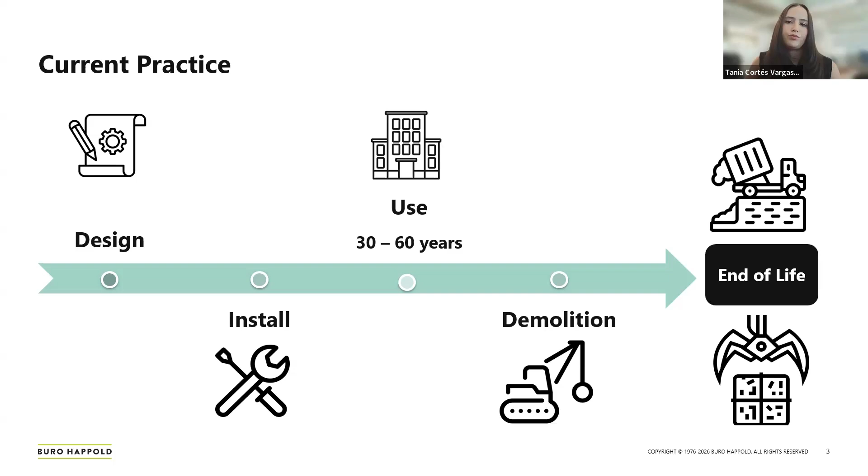So that's actually pretty critical, and this matters a lot because first, from a carbon perspective, reusing components avoids manufacturing new ones and therefore sourcing raw materials. And that helps preserve the embodied carbon that has already been invested in components that were manufactured. From an adaptability perspective, we don't really understand that buildings are not static entities. Buildings are always changing, and facades can become obsolete if they cannot keep up with those changes. And if they become obsolete, it's very easy that they get discarded. So we need to understand how facades and buildings in general can also adapt to the changes that we face regarding technology, regarding code, etc.

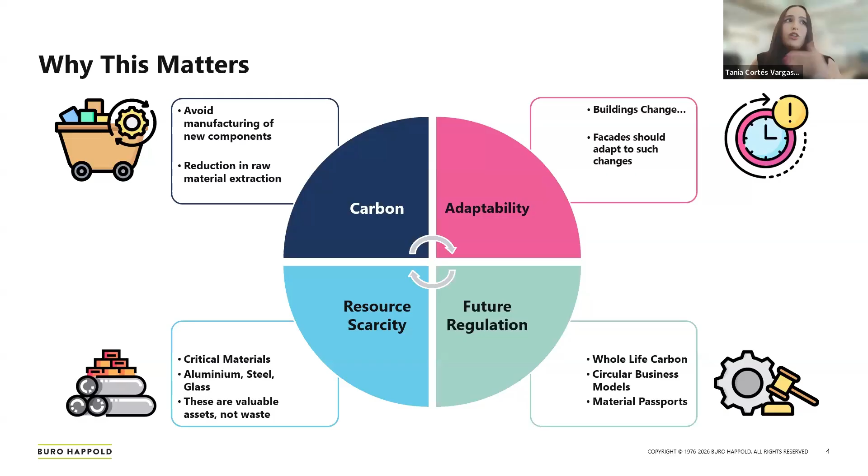And at the same time, we are facing an increasing resource scarcity that has actually been flagged in the case of critical materials by the European Union and the US government. In facades, we use a lot of critical materials. We use aluminum, we use metals that go into steel alloys, titanium, high performance glass, and such materials should actually be viewed as valuable assets instead of just waste. And finally, regulation thankfully is changing, and circular economy practices are becoming more normal in our industry as we push towards this direction.

So essentially, when we look at design for disassembly, what does that actually mean, and what would that mean in the context of facades? In simple terms, it means that we are going to design facade systems so that those components and those materials can be recovered without destroying their value. And we will design them to remain in use for as long as possible.

Now, when we look at a circular economy diagram, we usually see the butterfly diagram with a lot of loops. An important key takeaway that I would like to highlight today is that not all of those circular loops are equal, or they will not deliver the same value. We usually focus on recycling, and recycling certainly has an important role, but it should actually be the last option because it often destroys much of the value that was already invested in that product.

And actually, if you look at this diagram, the greatest value lies in extending the life of products through repair, refurbishment, reuse, and remanufacturing. And design for disassembly is what makes these higher value loops possible, because it allows those materials, those components, those systems, to actually go through those higher value loops rather than simply reducing them at the bottom to the raw material recycling loop.

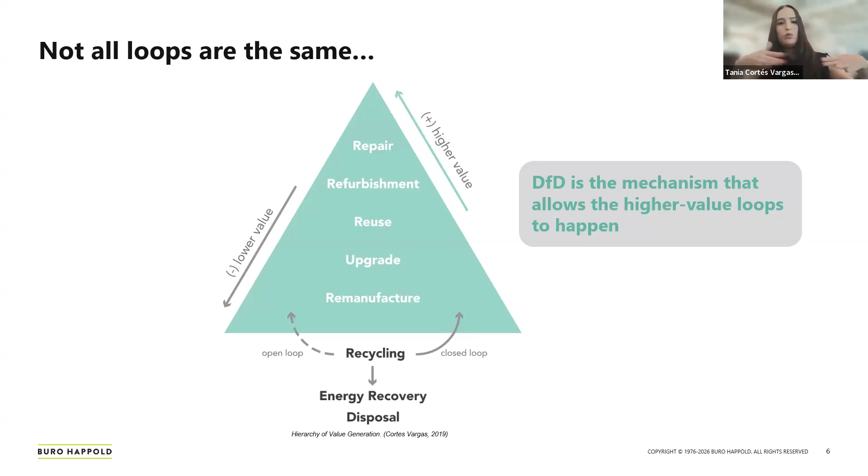So that brings us to think that ultimately design for disassembly changes the way that we think about facades and the way that we think about systems. So rather than seeing facades, building products, materials as just consumable products that have a single life, we should think of them as material banks. Understanding that a material is actually a repository of valuable materials and components that can continue creating value beyond the life cycle of a single building. So in other words, just because the life cycle of a single building is over, it doesn't mean that the materials or the components that lived in that building need to reach their end of life.

So as facade engineers, we always have to question ourselves: if this is the vision, what does it actually look like in practice? And we can talk about the principles of design for disassembly. They don't actually prescribe one construction system. Facades have so many typologies, so many different materials, that rather we need to understand it as a number of design principles. The one that we talk about the most is reversible connections, mostly to ensure safe deconstruction and that we can enable reuse without compromising the materials. We talk about material selection and recovery, how we should think beyond embodied carbon at installation and actually consider retaining the materials' value at the end of the building's life.

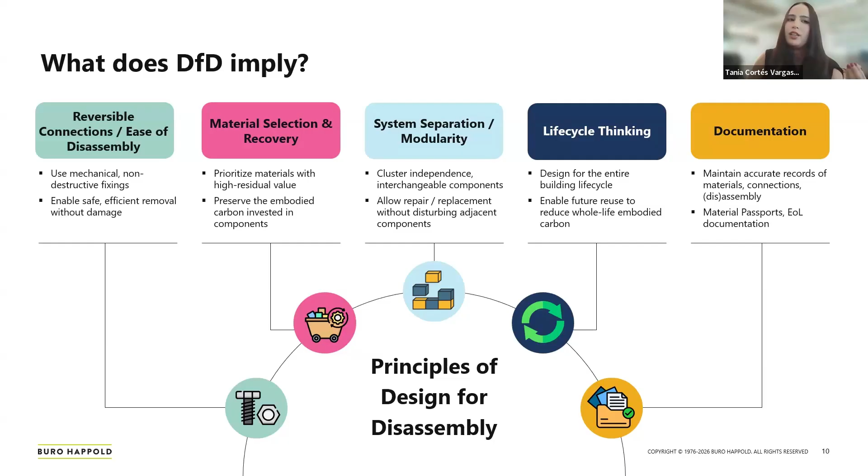Then the second ISO standard that we have maybe doesn't look as comprehensive, but it's actually very relevant because it's a framework of sustainability indicators and end-of-life performance. So it's actually very useful because it justifies the integration of design for disassembly strategies within recognized sustainability metrics.

In terms of European standards, we have the European standard for EPDs. And the important part of that is that it gives us the modules C and D, which in a whole life carbon assessment also justifies the benefits of deconstruction from an embodied carbon perspective.

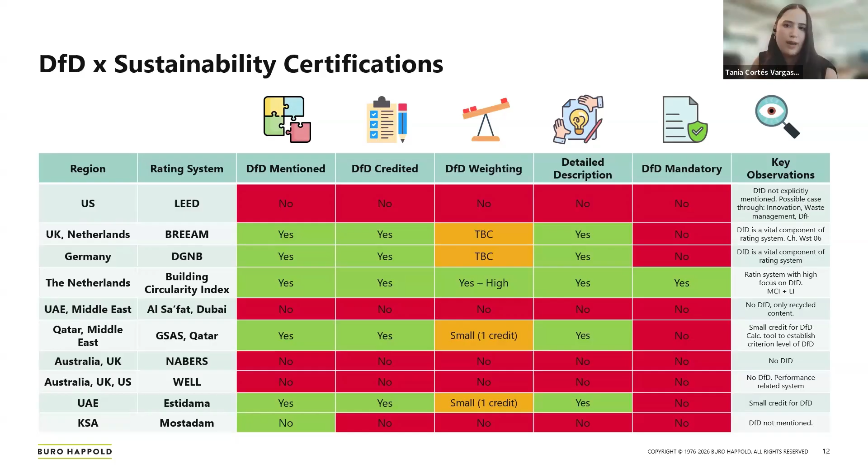There are some regions that are definitely more advanced than others, and it is important that we learn from each region and understand how circularity is incentivized across the industry, because those incentives are what, as facade consultants, might help us shift towards circular practices. So in a few words, there is actually no shortage of guidance, and that has been the biggest takeaway from my research since I did my Master of Science and now working as a facade engineer in the industry. We know how to do this.

And there are so many questions that arise, which are, is there even a market that is willing to buy reused facade components? Who will own those materials once a building reaches the end of life? How do those warranties apply to testing and to reused products? Who is taking the risk? How do building codes accommodate them?

And perhaps more importantly, who is going to be responsible for documenting how things are taken apart so that in 20, 30, 50 years, we can actually recover those materials. So there are a lot of questions that the multi-stakeholder industry needs to answer, and risks and warranties. And it's just that the general practice needs to shift because we're currently in a linear model, and it's very difficult to implement this in a linear model.

So as I wrap up my chat from today, I would like to leave you with 3 key messages. The first one is that why do we design for disassembly? It's not for demolition. It's actually about preserving the value of materials so that they can remain in those circular loops. Design for disassembly is a strategy that will enable that. Without design for disassembly, we cannot achieve circularity.

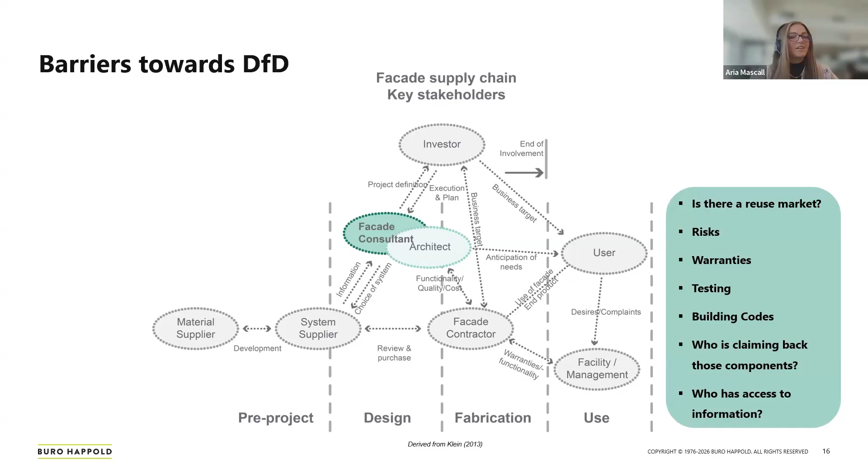Thank you so much. Okay, so our next speaker is going to be Sophie Pennetier, who's the founder and CEO of Digne, with 18 years of experience. Sophie's development in innovative glass products and circular solutions provide the basis for her exploration with us today as she dives into design for disassembly with the end of life for curtain walls. She will provide insight into current programs locally within the US and how they can impact the disassembly and reuse process. So welcome, Sophie, and thank you.

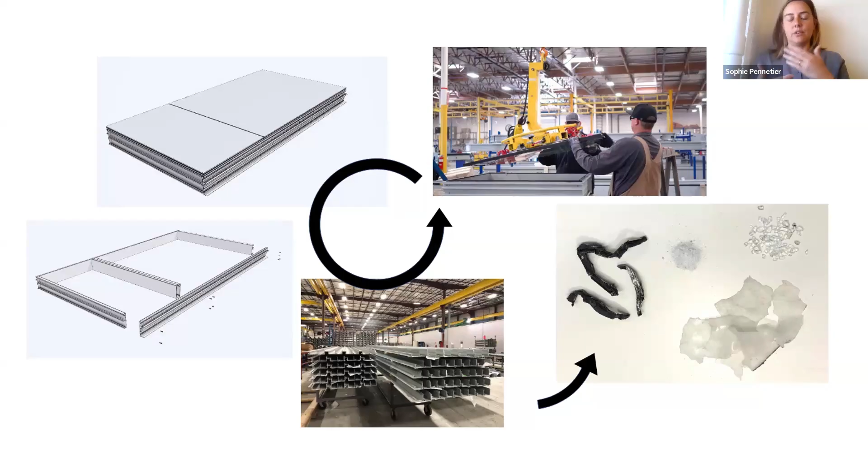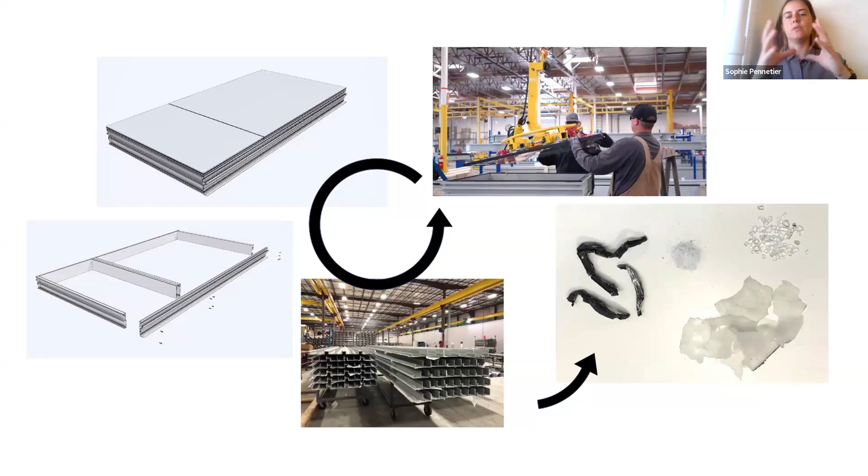Because whenever Enclos would have a call, say glass is broken by another trade or user, actually the contractors that install know how to maintain the system, such as changing the glass. And so we looked into ways to either operate in closed loop and opportunity also for open loop recycling.

So I would say to anyone that wants to change things, just start with pilots and try it yourself. If you don't have access to an acoustic unit from an acoustic mockup that you have here on screen, you can just go to your nearest Habitat ReStore and get a window and just open it up in your parking lot if you want. So with my former colleagues at Enclos, we looked into the more typical deglazing in vertical state as well as horizontal, keeping track of timing.

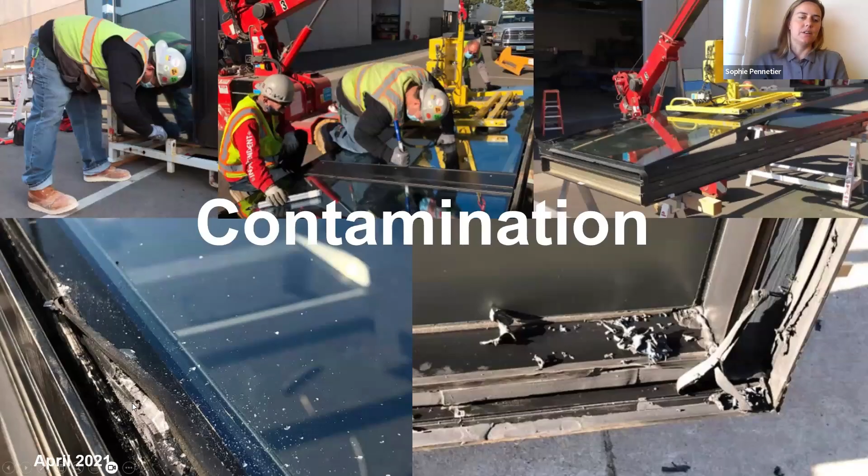So labor is going to have a huge impact on the cost associated with unmaking windows and curtain wall, as well as the level of contamination. If you want to go fast, there's a risk of damaging the materials, which could actually reduce their reuse or recyclability potential. For instance, on glass, as soon as the glass is broken inside, it's a little harder to bring it back into a full window. This is possible, but it's a lot of roadblocks. However, you can always downcycle it to insulation, abrasive, and such that I'll talk about. So lots of potential. So there's always going to be this balance between time and contamination level.

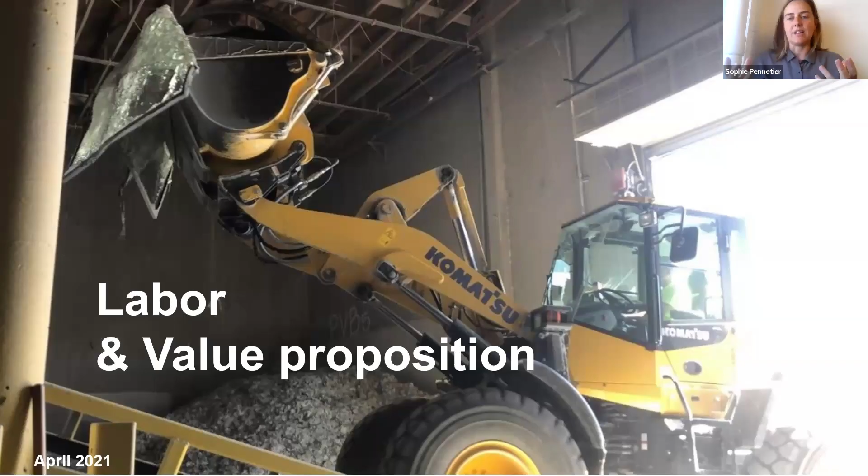Same for aluminum. There's a lot of amazing work by the Aluminum Extruders Council looking into circularity of aluminum extrusions. And several cast houses around the US would accept painted, anodized, or even a bit of silicone traces. That's not a huge deal for recycling of extrusions. However, the stainless steel fasteners might be an issue. So that is also labor intense. So when you're looking at the value proposition of reusing or at least recycling those materials, there's always going to be a trade-off versus speed and value.

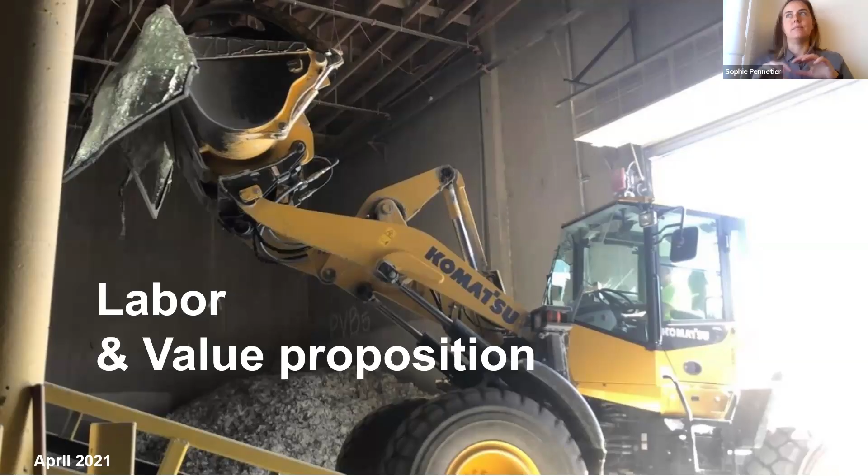So here, the idea that you just saw previously on the screen was brought into an automotive glass recycling facility. And so we were able to separate glass, PVB, spacers, and such, and have them recycled, downcycled into their highest reuse diversion potential. So as you're all saying, there's lots of need for collaboration with the people that are making, and they're the best to help us devise different tools, accesses, and design that are unlocking those opportunities. So it's a good moment to bring in architects and consultants for them to hear what they can do today to change their designs.

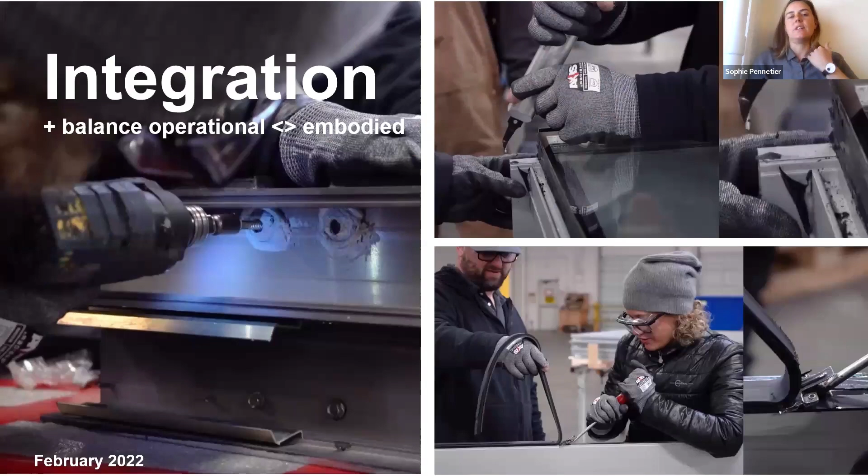For instance, in that specific case, whenever you have vertical blades near your mullions, you start to create some blind conditions where you need an L-shaped tool to go deglaze your units.

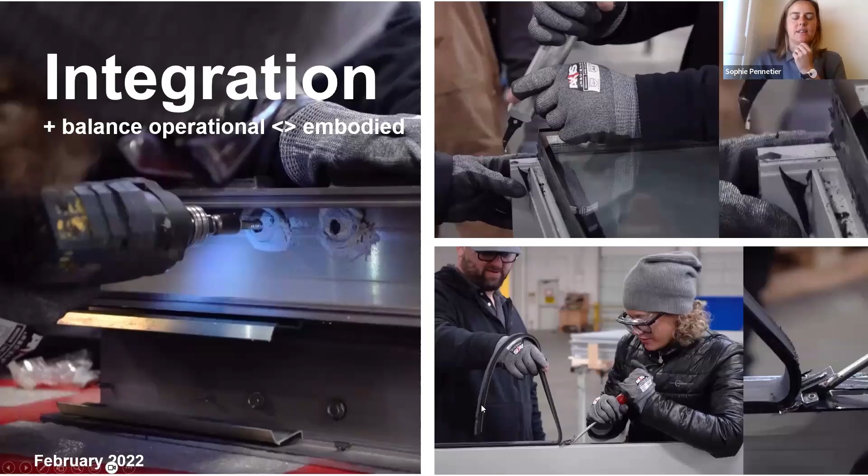That would not be an issue if you just had fewer difficulties to access those. Or where are those things? You know, there's not one size fits all. In that specific case, you have a horizontal to vertical bolted connection, fastener connection. And if that connection is in front of the water line in your curtain wall, you might have to anticipate that you cannot come in the field and fix all of those.

So you'd have to possibly dab those sealants in fasteners and sealants to really maximize the performance and really have a long-lasting system, as well as optimizing for energy loss or such. So, at the facade, we're at this interface of operational carbon and embodied carbon. And so the pie is 2/3 operational, 1/3 embodied.

We still need to make systems that don't leak. That's very important. So all that creates multiple pathways for the glass. Most of it today goes to landfills. So the task we have is to at least start to divert it. There's a lot of work in concrete, as either cement substitution or aggregates for some exterior civil works.

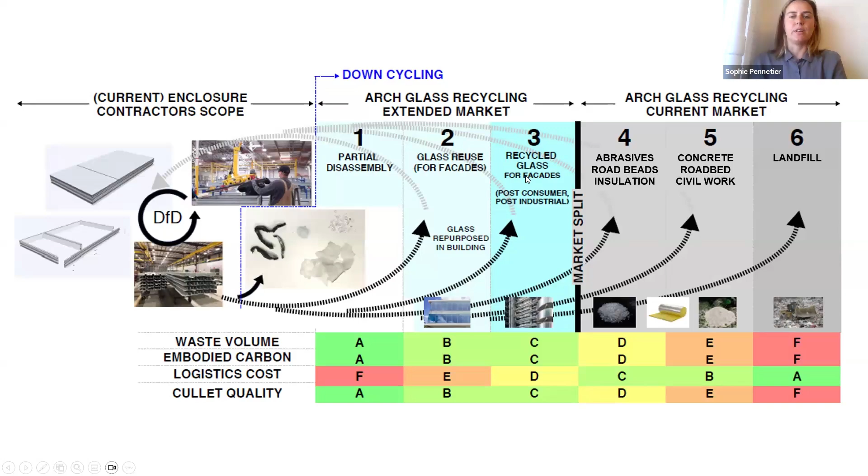There's also a lot of innovation in roadbed integration. And then most of the work is turning glass into either abrasive, road beads, or glass insulation. However, these represent market splits. A window doesn't necessarily make a new window. This is why we operate in the space of trying to keep the glass unbroken as long as we can, to really minimize contamination. So let me show you a few examples.

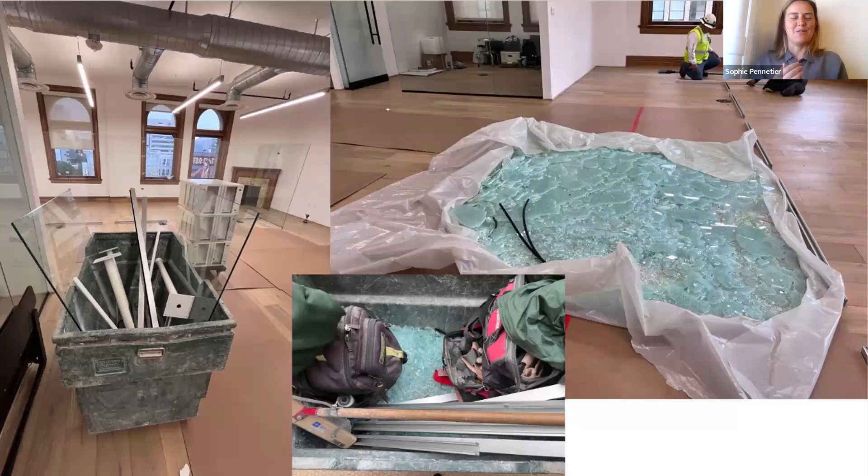So if you're a member of the National Glass Association, you have the opportunity to go to the Hill, talk to House and Senate representatives and see what piece of legislation is in the pipeline that would allow for diversion of glass or recycling of building components. That's going to take time, and you can see it's a really long road. So look at little pilots that you have around you. If the facade is too hard to access, look into opportunities for interior glass.

So this is actually Enclose's office in the Bradbury building, when we had two white boxes when we left the office. We were able to divert furniture, metals were recycled, but the glass itself has no taker. And so pairing our deconstruction company with our recycler was the next step, trying to find somebody that would buy this material just to dispose of it.

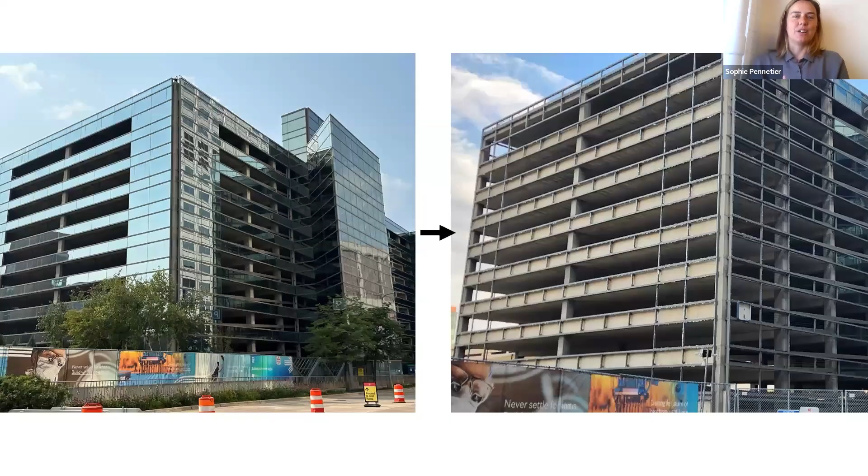That is going to be this next step. We tried a pairing, didn't work. Tried the next pairing, didn't work. But the third pairing, that worked. And we're going to talk about it a little bit in a second. So really look at any opportunity for a pilot.

I'm going to slow down a little bit now and talk to you about another pilot that is sponsored by the National Glass Association and the Aluminum Extruders Council, contracting Digne to perform an end-of-life study, so modules C and D that were just mentioned by previous speakers. This project is a parking garage in Rochester, Minnesota. And the glass itself, as well as the materials, were recovered.

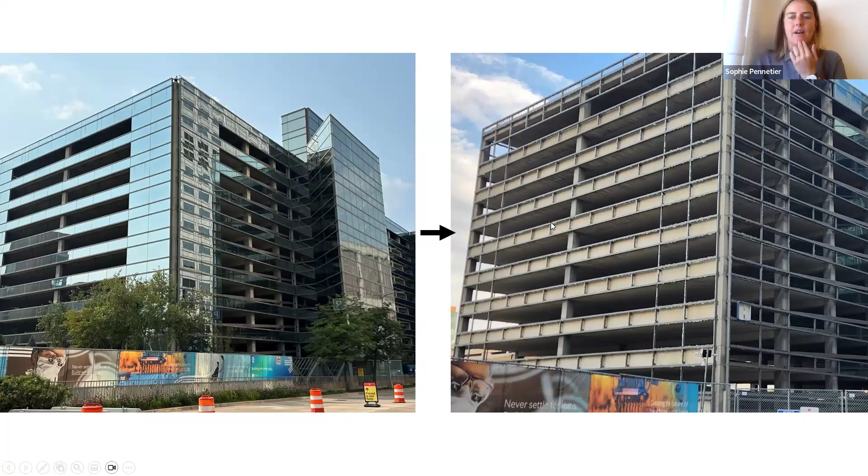Now, the method of recovery was such that the glass was broken on site, raining down at the interior of a net to a place of collection, and then brought into Infinite Recycled Technologies' pipeline. So the idea was that people would just bang the glass, which is probably not the safest thing to do. And then a third of the glass was recovered. And that is really due to the means and methods.

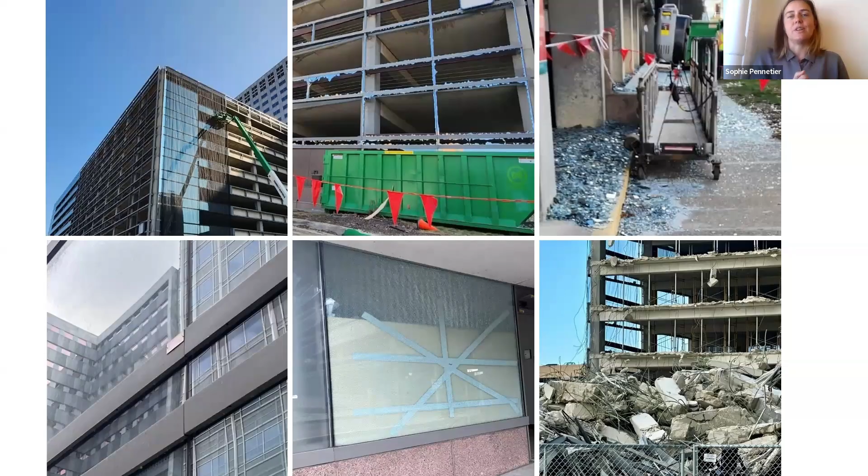So what can we learn? I mean, a third of the glass recovered is actually better than any of the buildings that you guys design today. This is fantastic. Let's try to aim at better. So we're learning from this, and we will publish something more in-depth, but really the quick cliff notes are that early owner involvement as well as GC means and methods support is going to be key. It's not enough to just guilt trip people into doing things.

If you can actually help the GC speed up their schedule, actually removing large units would have been faster in that specific project, as well as enhancing safety. That's going to be a big deal for GCs. The system is going to be driving the recovery rate. So whether it's gasketed or caulked in with silicone, you might have different times of labor for recovering the system. So always something to look at.

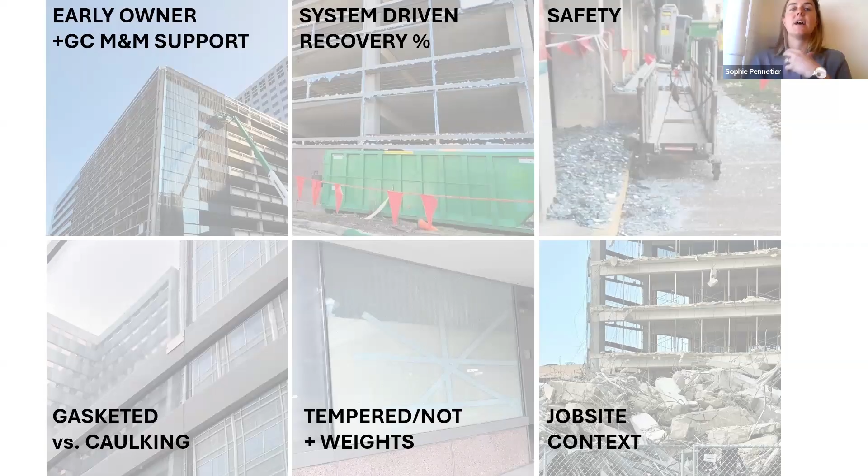Whether the glass is tempered or not will enhance its capacity to be handled, and also the way it breaks on site. So this is actually one of the storefront units we had that was tempered, unlike the rest. And finally, job site context. We may as well have studies from Europe. They're fantastic, or studies from other cities in the US. They are super different from the winter arriving in Minnesota, or the labor rates are completely different from coastal markets. So the recovery of these facades as they're unmade is going to be different from other contexts.

So here in Los Angeles, we have now completed this little local program where we're nearing 200 tons of glass recovered from interior partitions, thanks to our partner IRS Demolition, who does interior partitions. And so today this is sent to abrasive, insulation, and such. And we're piling up. We have large containers full of glass right now that is downcycled into abrasive. We're extremely happy that it is going out of landfill. However, we need to find ways to further incentivize the recovery of the glass.

This is why with Digne, we're developing solutions which include remelting the glass in order to sell it at the actual cost of a sheet of glass. It has a third of the carbon footprint of a float glass, so it's lower carbon because it's powered by solar PV in sunny California, so it's kind of nice. And then we can produce really large sheets for integration into your facades. So we have an active project with Gensler and some pipelines with other architects. And we do also have pilots: a chapel in Arkansas and a pilot in Long Beach. We are backed by the LA Clean Tech Incubator and the USGBC California Net Zero Accelerator. So these are some of the products we are selling.

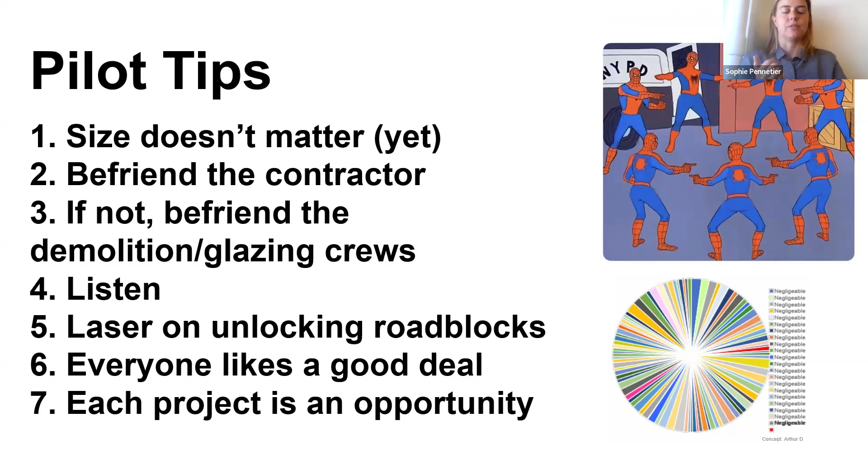Focus on roadblocks one at a time. Keep in mind that everybody likes a good deal. Like, I bought my car secondhand. There's also people that are actually ready for faster and cheaper glass partitions. So that's something that you can put ahead of them. And yeah, every project is an opportunity. It's not a matter of if you're going to be successful. It just might take time. You might get to the next one, but at least you can harvest some knowledge.

So in closing, I want to show you the rate of recovery of post-consumer architectural glass across London, New York, and LA. The choice of color is not just by chance, but I just want to show you something. London in 2023 or thereabout, according to my personal source, was at a figure of roughly 30 or so tons of recovered post-consumer glass. Did 10x, actually 12x the year after. And then a few years later, New York is following that trend.

So last year, New York City, thanks to the effort of Sydney Meister and this group of leaders surrounding her, achieved 272 tons of glass, US tons of glass recovered from buildings. And they're also going to 10x next year, or thereabout. We'll see where they land. And we are about to surpass New York City here in LA, and we're very proud of it. And I'll wrap up in telling you that a little bit of competition never hurts. There's a cool thing coming from England, and if you can just have coastal markets trying to compete against each other, I think this is always going to help.

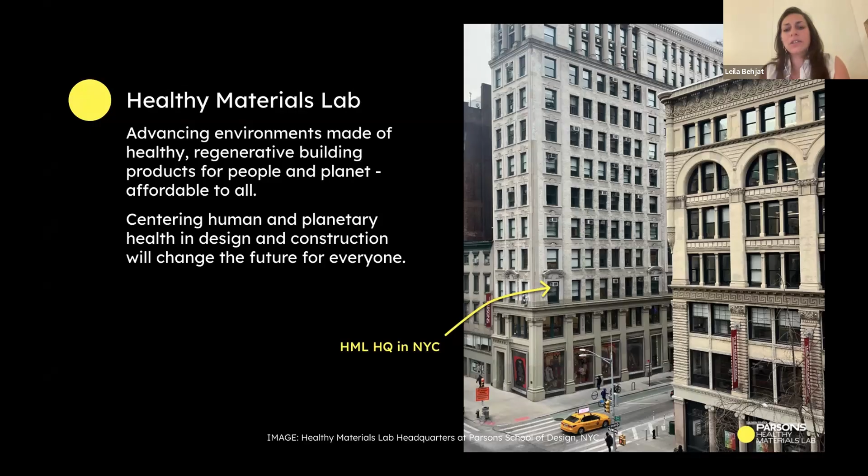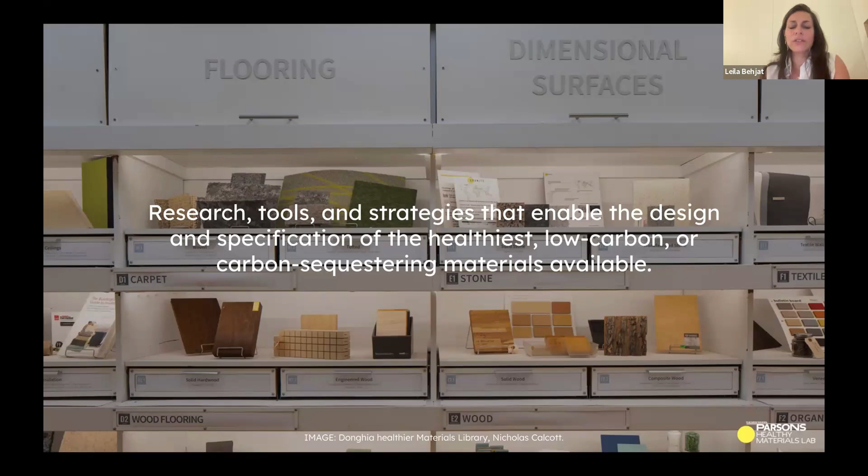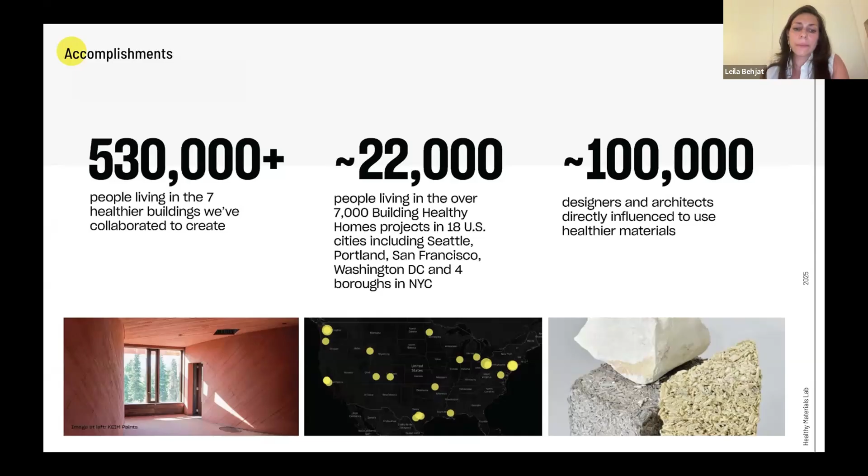And we share research, tools, and strategies for the design and construction of the healthiest low carbon and hopefully also sequestering materials available out in the market. So over these last 11 years, we have collaborated to create healthier homes for over 500,000 people, and our courses and resources have educated over 100,000 architects and designers.

We also do demo projects to show that healthy building is possible today. Like here in the PA hemp home, that was a hemp lime renovation in the US. We collaborated with a community housing provider, Dawn Services, in New Castle, Pennsylvania. And this rather small affordable home renovation then became the example used to change the International Residential Code to include hemp lime as a viable bio-based insulation option.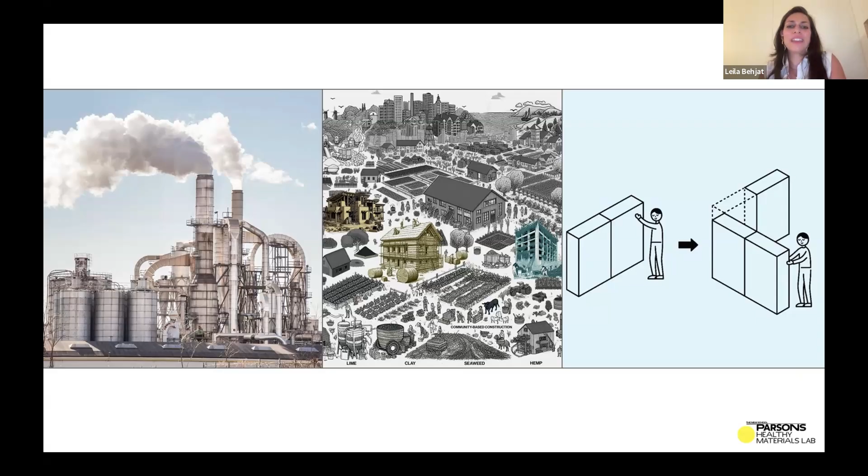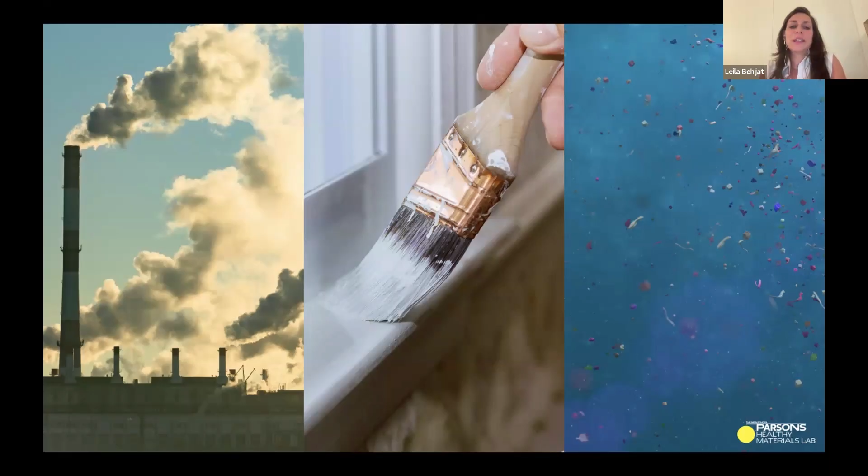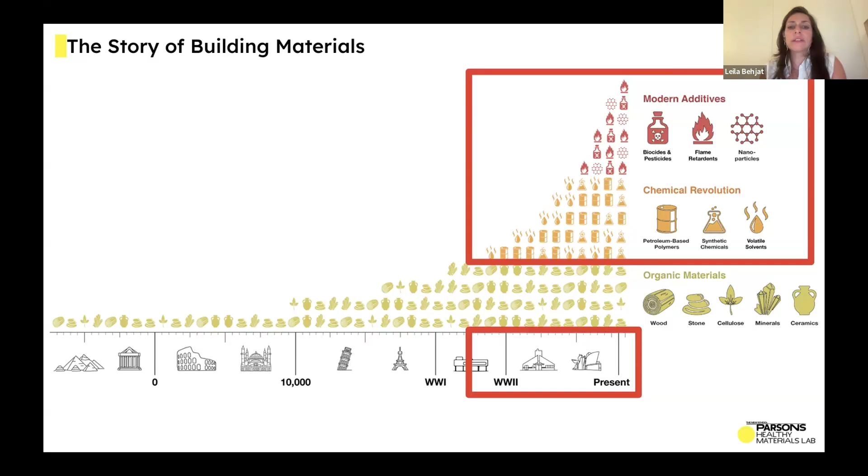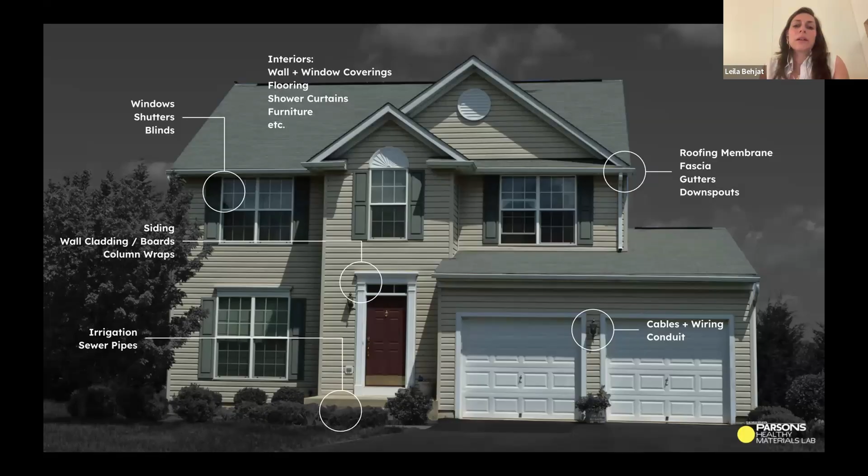So we know that our industry is accelerating climate change, causing toxic burden to people, polluting our ecosystem, contributing to the triple crisis. And we also know how we can change this. The innovation in synthetics and industrial developments are only a few generations old, but as I think all of us in this room know, it was very convincing. And as a result, construction products are made from the petrochemical byproducts of the petroleum industry, which means that our interiors and exteriors are made from petrochemicals. There's a new report from Denmark that shows that products contain PFAS throughout industries, including construction products used in facades.

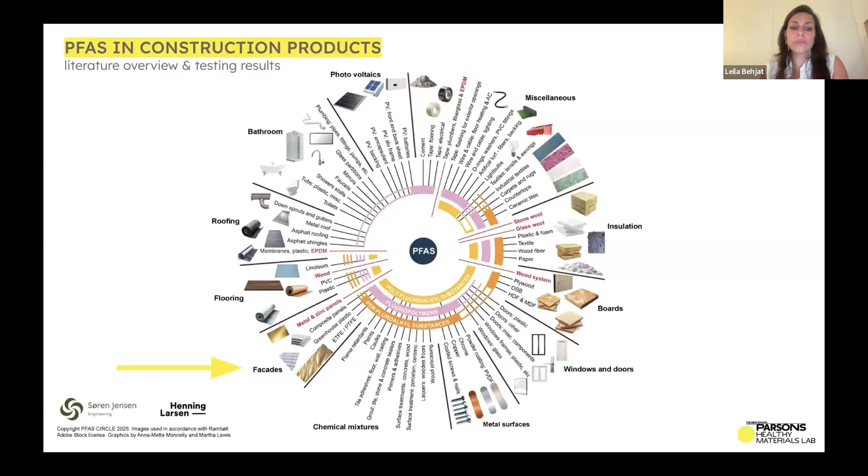So in turn, prioritizing the use of bio and geogenic materials is an effective way to achieve decarbonization and detoxification goals for the betterment of ecosystems and humanity. And we see that the industry is responding, offering more options and products every year. Facades are especially important to consider as temperature, weather, and wind drive the degradation and aging of cladding, and particles fall out, leach, or off-gas naturally, and then it's intensified through this process. A facade mediates heat, and in the context of climate adaptation, that then is intensified by the increased and prolonged heat impact on the envelope.

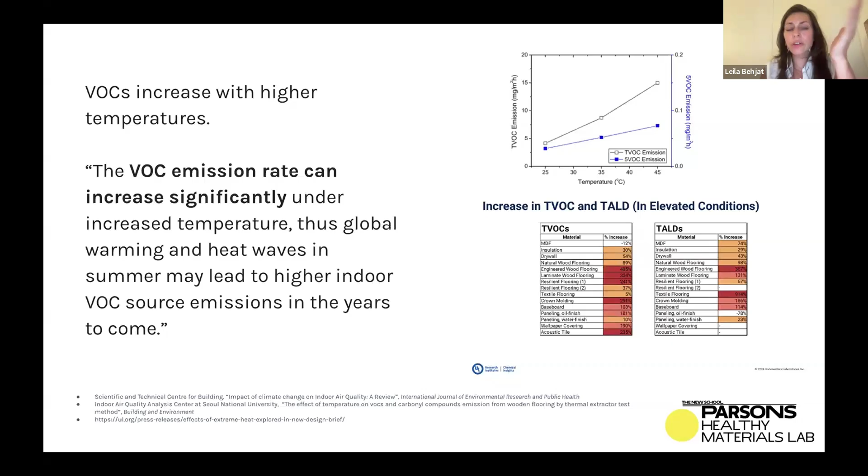I'm showing here emissions from interior materials such as laminated flooring, etc., through elevated temperatures, which then begin off-gassing substantially, and the elevated temperatures here are in the range of 100 to 113 Fahrenheit. So emerging data shows that heat doesn't just stress the building, it changes what the building emits. And then as temperatures rise, some semi-volatile compounds can shift into fully volatile behavior, meaning materials can become more emissive in ways that are not captured in standard test conditions.

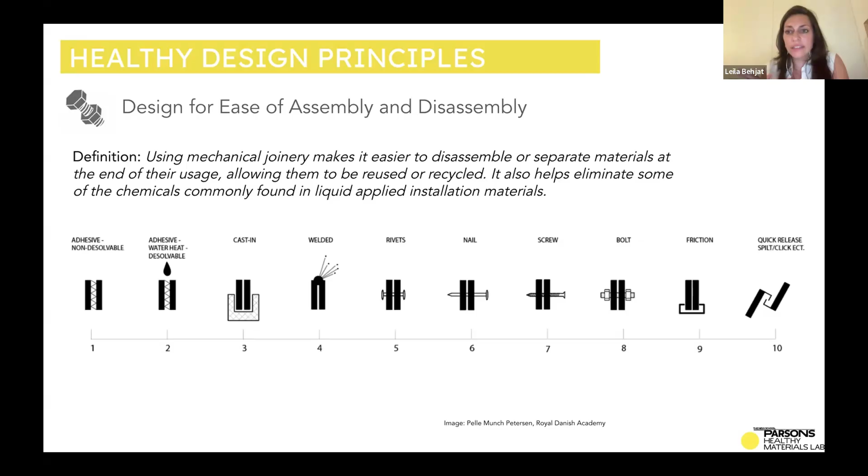In our collection of healthy and regenerative products, there are some available options that can replace typical 20th century products that are increasing these issues and burden our environment. So the question that is at hand today is, of course, whether these healthy bio-based facade materials that we want to move towards can also cater to the need to be recoverable and support design for disassembly by basically making use of joinery that avoids adhesives. And there are great options out there. You can find some on our exterior and structural material collection. And I want to now zoom into two examples with you in the following.

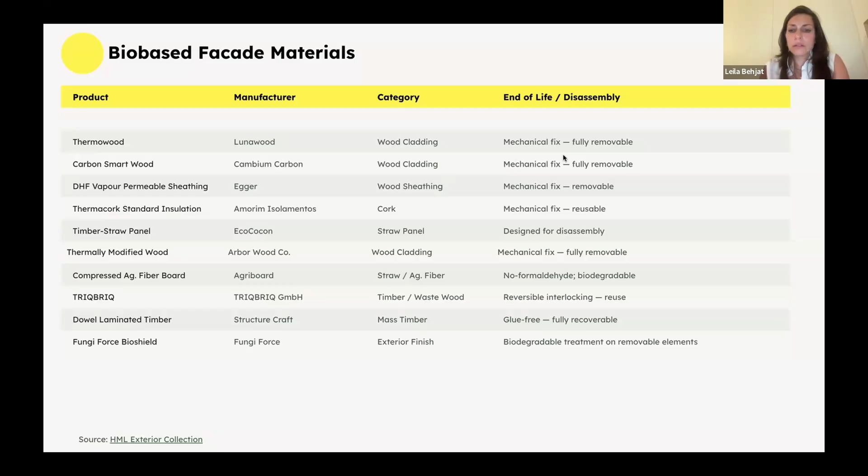So straw building, meaning using the byproducts of food production for construction, is obviously not new, but we are seeing that we are on the cusp of its acceleration.

Sorry, I keep getting stuck with the slide projection, sorry.

So the Lithuanian-based company EcoCocon has been modernizing the practice of straw building. Their award-winning panels consist of 10% FSC certified wood and 89% straw. All of their pre-assembly cases can just be reversed and disassembled. The manufacturer states that in their digitalization process, from planning to production, it is designed for this.

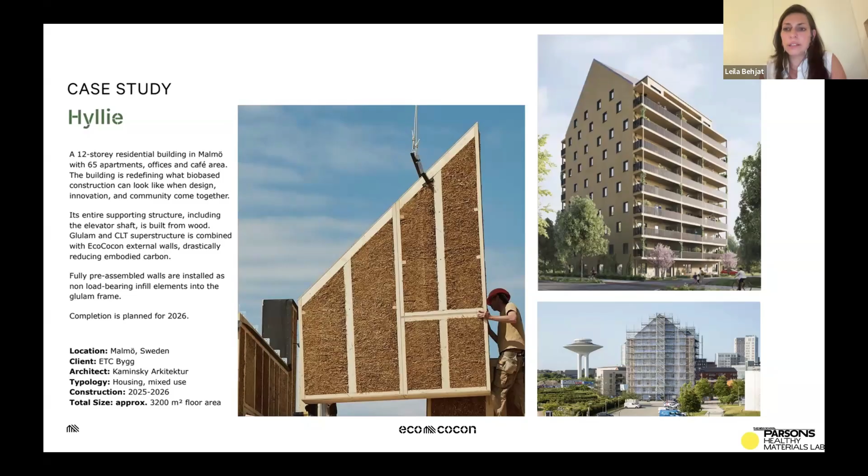And this 12-story residential building that you see here on the right is made from a glulam structure, and then it has this infill with the straw walls, with the thought that it can be disassembled in the future. The process is prefabricated and modular with several standard straw wall components like lintels, etc.

And what I think is so interesting in the combination of this with the intelligence of material is that the straw is densely packed, the oxygen inside is limited, and that thereby inhibits microbial growth and also limits the rate of decomposition and helps with fire retardancy. So it decreases chemicals.

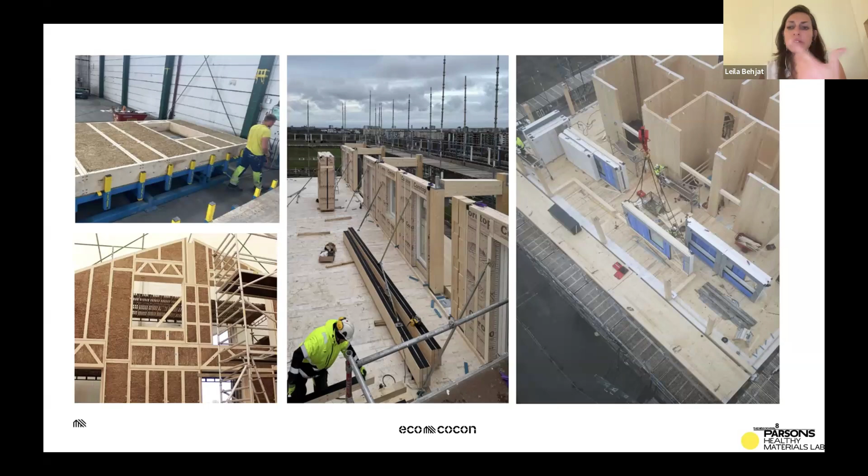This logistics and distribution facility in Lelystad, the Netherlands, was designed by the Danish design firm Henning Larsen and executed by a Dutch contractor. The building integrates 40,000 square meters of EcoCocon straw panels and has the same concept for the future.

And then the second material, cork, is another standout material. In itself, it's porous, lightweight, it avoids resin and is breathable while being fire retardant and impermeable to liquid and gases. It's thermally insulating and fully biodegradable, which makes it very ideal for different applications, such as insulation, flooring, but also cladding. And a great example is the Cross Cabin built in Austin, Texas.

It's by design healthy and recoverable. It's a cork facade, a CLT frame, and hemp insulation. It was designed and built to not trap toxins and not block disassembly. What I thought was interesting was that it was built for under 430,000 and also calculates carbon negative.

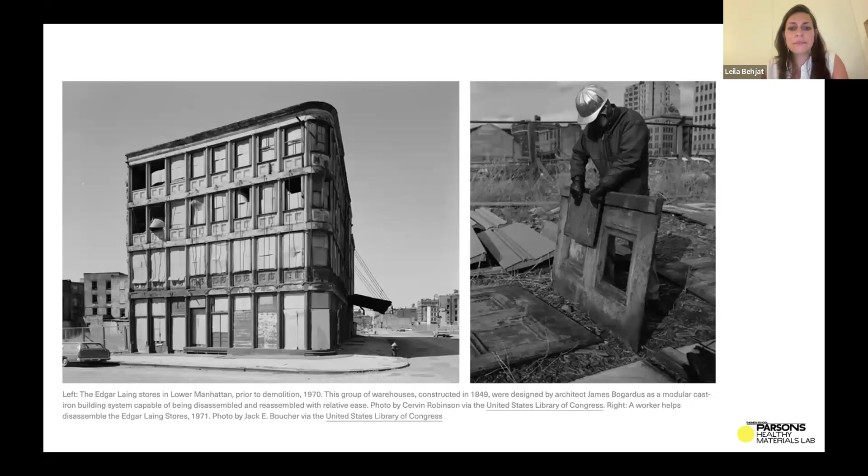So in conclusion, facades that are bio-based and can be taken apart and reused are the matter of the future. They decrease emissions, they help heat adaptation today, and then do not add to resource depletion and landfill tomorrow.